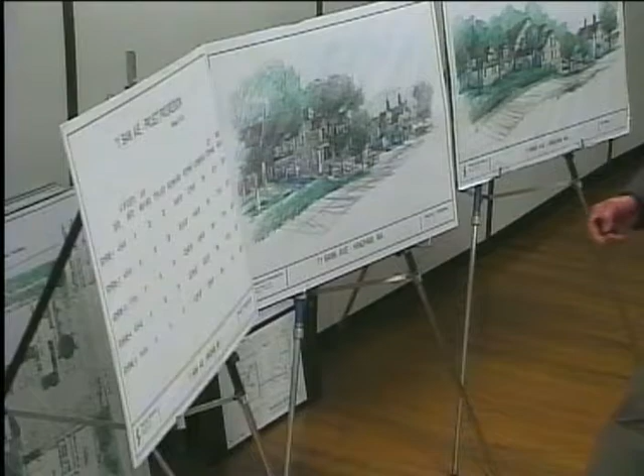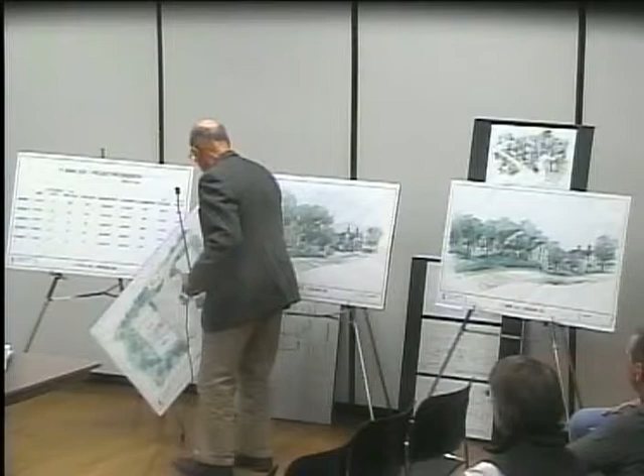And this is our 5,000 square foot footprint. The intent here is to design a building that is really a sister back building to Bank Ave, with similar detailing, 2-over-2 windows, much more compact footprint, and build it into the slope so that all the retail activity—we have an in and out roadway, by the way, eliminating sightline issues—the retail and parking area activity takes place on this lower level, which is 12 feet below the upper part of the Bank Ave site.

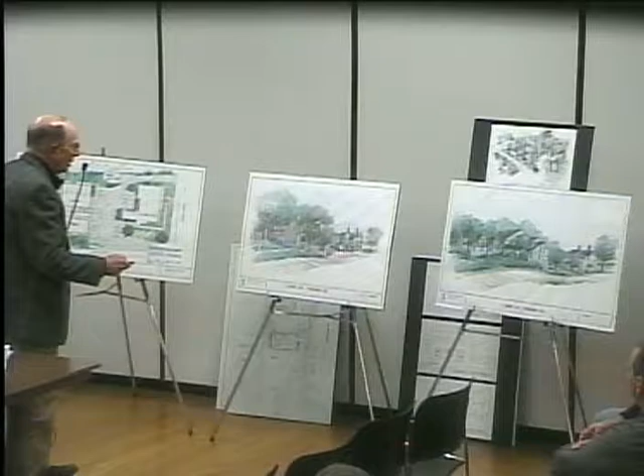It's a very viable little close, what you'd call in Britain, but it's like what exists in Plymouth—little commercial spaces that come off the main street. The activity going into the parking garage is at the lower level.

Comparing it with the previous scheme, where we tried to develop some one-story elements to keep the scale down, but the footprint was larger—you can see the difference. A lot of this ground is left untouched.

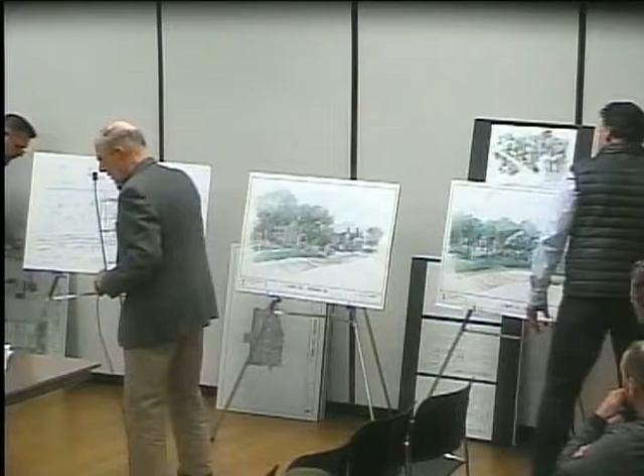Here's the overall view, not quite to the Olin's property at the end of Bank Ave, but you can see how minimally the site is impacted by the footprint. These buildings are 90 feet apart—there's a lot of space to maneuver and buffer. The building is 30 feet back off Bank Ave, 35 feet off this border, and over 100 feet from the back border.

And even though this existing ridge is at 27 feet, with about 8-foot chimneys, this ridge is at 38 feet—so we dropped that from the 50 feet we showed in the scheme presented to the planning board.

So I think we can get into elevations if you want, in some detail, but I'm going to twist it around—need that wireless, I'll grab it, we can bring more up.

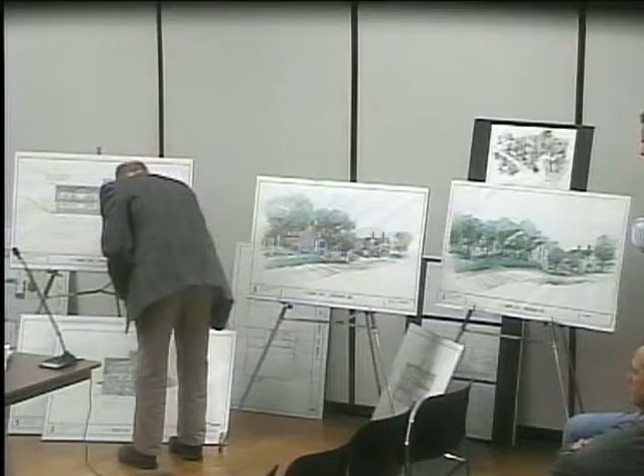Do you have a left side elevation too? Because that's going to impact the Bank Ave side then.

So this is the same stepping up. Now being 30 feet back off the property line on that side of Bank Ave, there's a lot of opportunity, which we didn't show here, to plant and to buffer.

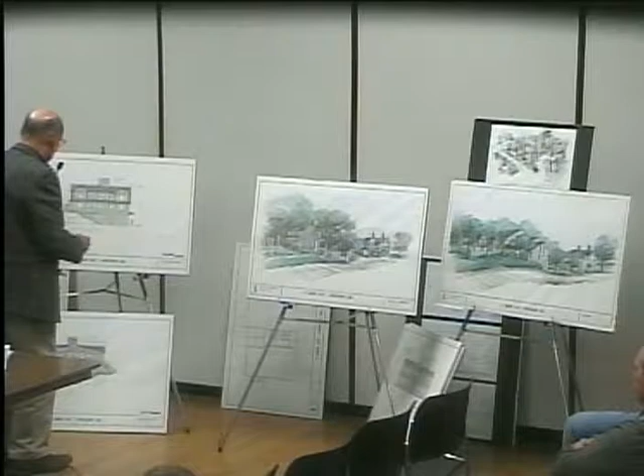But that's the Bank Ave view looking toward North Street, and this is the Bank Ave elevation with the stone and the broken roof line, stone chimney. The lower level.

John, anything else, or good? I think we were asked just to present the plan, you folks all have copies. I think that was the intent of tonight, just to introduce the property and the proposed architectural scheme, and we'll look forward to coming back in December on a more formal basis. Okay, really appreciate it. We appreciate the time tonight.

Any questions for John or for Sevi? Who would like to start? Any thoughts? I have a question. Yeah, please. Sevi, the stone that you mentioned, can you give a description of what that stone is? Is this a cut square stone? Is it irregular? It'd be a fieldstone, informal, irregular, a veneer.

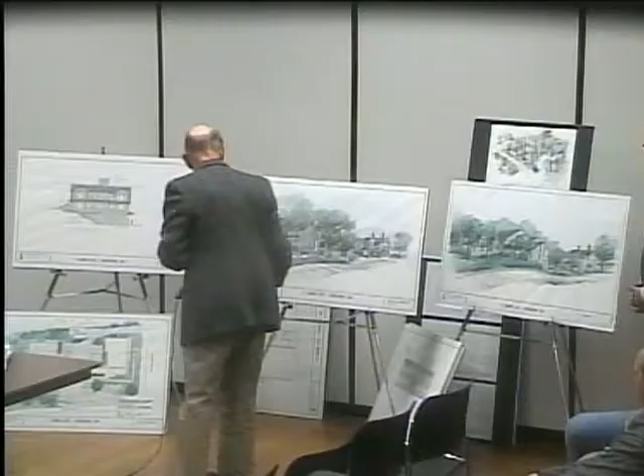Okay. But it would be 2-inch plus or minus to get texture to it. But it'd be an irregular fieldstone character, much as we're indicating here, it would have a variety of color, something that would fit into a hillside. Right. Is there any stone on 105?

Is that all clapboard? It's all clapboard, but that is a flat site building, and the point is not to replicate 105, which is a flat site building. This is kind of a secondary, almost a barn-like, informal approach to it. So it's a sister building, but it's secondary. It's not a replication of 105, so we think the stone adds that informality and softens it and reduces scale. But it's quite barn-like.

I guess I'd just like to see a sample of the stone. Oh, yeah, I would, for your... There's a lot available now. We use quite a bit of it. Okay.

Are you planning any modifications to the North Street property, or is it strictly the demolition of the one building, site work, and the addition of the new big building? That's accurate. I acquired the property this past year and plan on making kind of cosmetic improvements, but in terms of structural or anything with respect to footprint, no. Really, this is specific to the back parcel. Okay, okay, thanks.

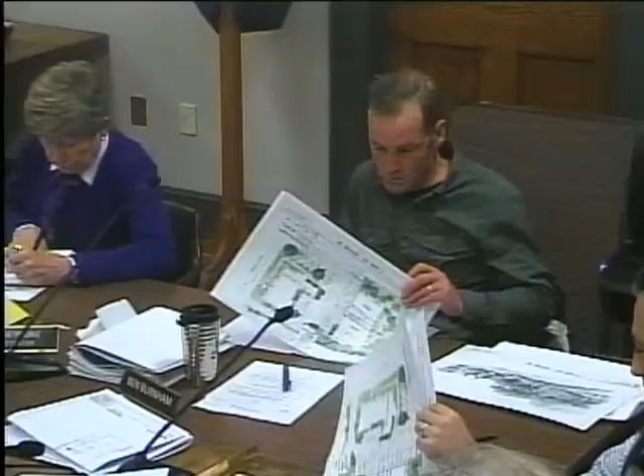One other comment in regard to the elevator and the override. I appreciate the need to do it on a small building, trying to squeeze an elevator in there. I'd just be concerned about what that override ultimately becomes and how big it is and how tall it's going to be, because it looks pretty big now, and maybe there's some accuracy in terms of the height, but I'd be concerned about what the scale of that is compared to the rest of the building.

Well, it's an elevator, 13'8" off the last stop. The elevator that I know you're very sensitive to on the Lincoln building grew out of the fact that the roof was the last stop. That was a roof terrace, so it had to go another 13'8".

I've done elevators enclosed like that—Scott Oliver's medical building down in Duxbury on 3A, a very traditional looking hotel-like shingle-style building, and actually on the Kings Highway in Barnstable, which is all highly regulated historically. So the vent is quite small relative to that. It could be on the back side, just a 2x2. But the size is accurate—I mean the elevator shaft. The elevator shaft is approximately 8x8, and that's what we're showing.

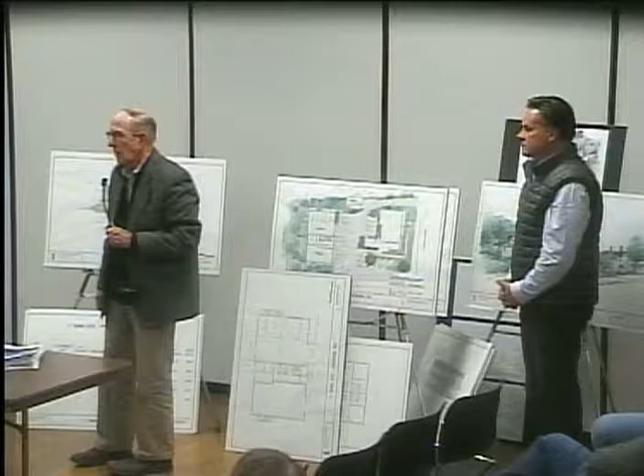We can show that in sections. Obviously, it's bigger, but the ridge, essentially what faces those houses, is 2 stories. That ridge is 38 feet from the lower level. From the upper level that faces the Bank Ave houses, it's 26 feet. Although part of that drops down, right? It's not all... it drops away. Correct.

But it's also 40 feet from those houses, so it's a considerable distance, and it's an opportunity for buffering.

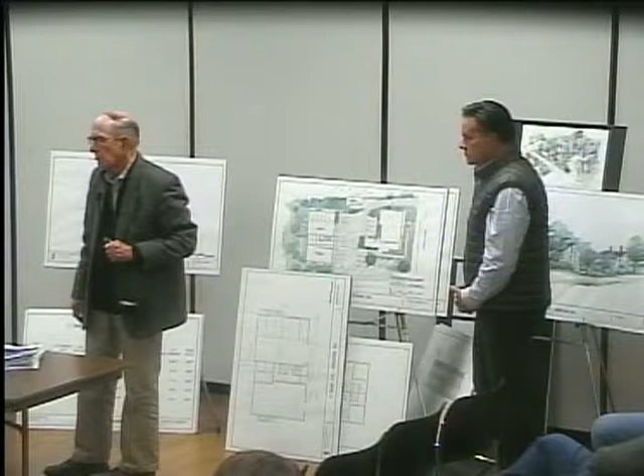Do you have this drawing staked out right now on the property? No, but we could. Come out to see it? That would be really helpful. I went on the lot, and I can't imagine it, but to see it that way would be helpful.

Can I follow up a little bit on that comment? I think it's important. We've been working on this for a while, and I'm in the business of land use and zoning. The piece of land is zoned commercial, with 0 setback requirements under the town zoning bylaw. There are no coverage requirements in the commercial zone, and there's no stated height restriction.

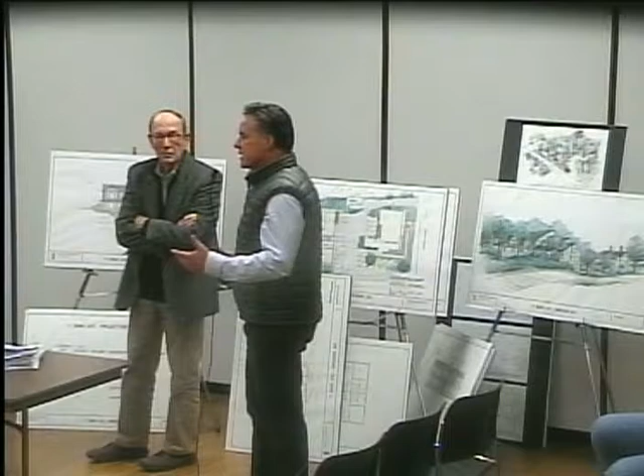We've really dramatically scaled back what we're proposing on the site to accommodate the abutters and comments from the other boards. By right, a commercial building could be built on this property with zero setback requirements. It's not meant to be threatening, it's just saying we've worked very hard to mitigate the concerns of the abutters. It's a transitional piece of land, not right out on North Street. It sits between a commercial district and a residential district, and I think what we're proposing is definitely in scale and keeps with that transitional zone.

I just wanted to point out that the zoning for this property is commercial, and it seems a mixed use of this scale is what's appropriate for it. I think Sevi has represented it very nicely in the architecturals, and our team, John Cavanaugh with Cavanaugh Consulting, we've worked for 6 months now trying to get to a point where we have a proposal that really works fully within the spirit of the bylaw, and is very accommodating to the abutters in the downtown district.

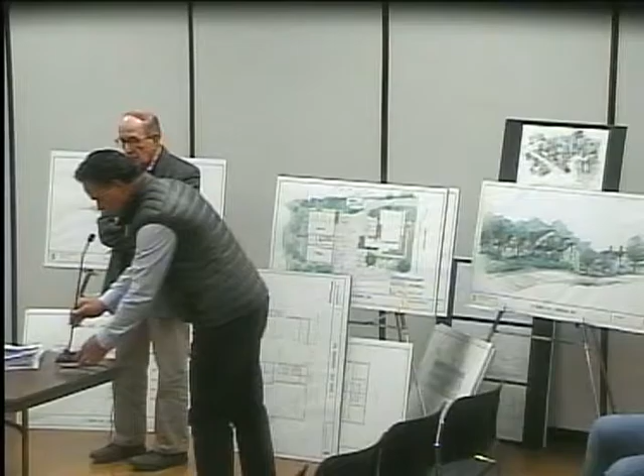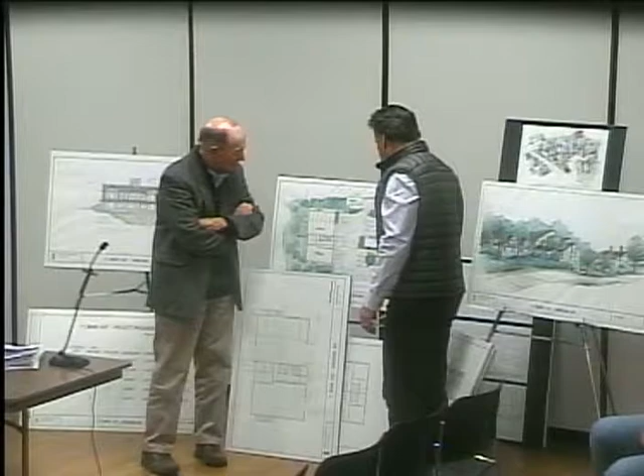What's the square footage of the building in front? The total square footage of the building out front? Sevi, do you know that off the top yet? How about the footprint? The footprint is, you're looking at about 89... this is a 90-foot building that scales at probably 75 to 80 feet wide. At the deepest point, it's probably 60 to 70 feet. This building is 55, so it's generally in character with the footprint of the building out front.

This is bigger, but it's... don't forget the microphone, gentlemen. Oh, sorry. It's larger, but it's connected to it. It really is the same kind of footprint. So we can give you those numbers, but it's not about the numbers, it's about the relationship.

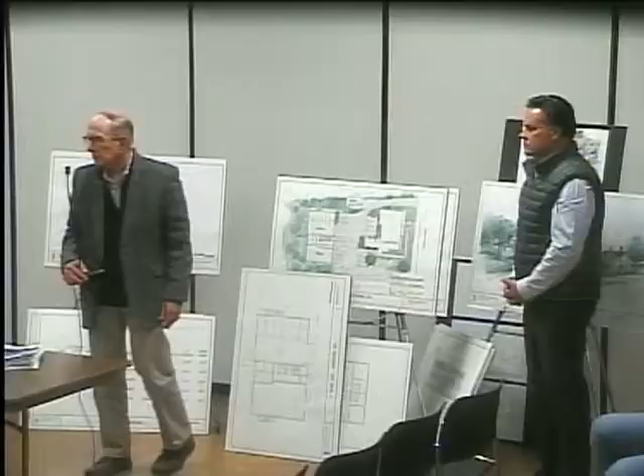I think it'd be helpful, because the Bank Avenue homes are certainly smaller, as Mike's pointed out, but that might be the best one you want to use in your favor as a comparison. So those numbers would be good, handy to have, I think.

I will say, I went to the planning board meeting a few months back when you guys had your first plan. You've come a long way, there's no question. The original design was substantially larger, and the numbers show it. So I hear what you're saying, Joe.

As it relates to the new construction in the back to the front, would it be possible to see this in a model as well?

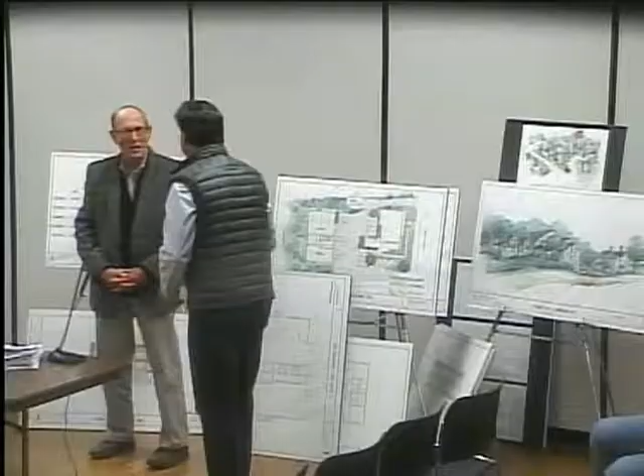So, would you have a model of the front building as well as the new building in the back and the immediate adjacent buildings? Sure. I could find someone who could do it for you. I think the answer is we could provide a model. I think one thing is to stake it out, but another thing is to actually see it in a model as it relates to the immediate adjacent buildings.

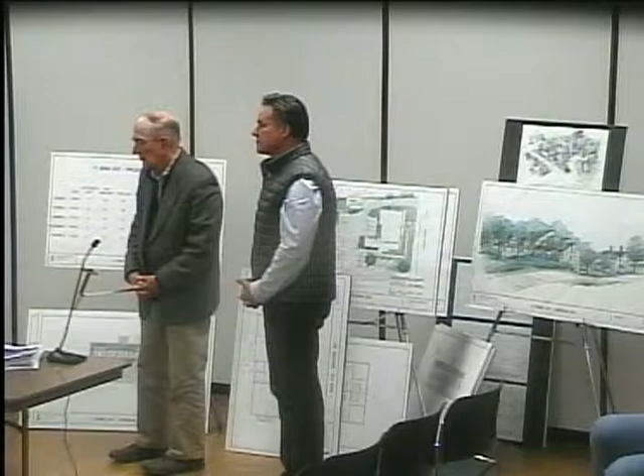Yeah, I mean, would story poles help in this case? We could ask for that at some point.

The model might be more appropriate, just because I don't think we need to do a model of all of Bank Ave and all the adjacent houses, but I think standing there with story poles - we could easily do a model of those two buildings, but is that really going to satisfy you compared to story poles?

And the grades - I think for the neighbors and for us, if there was a way to show this ridge going parallel to Bank Ave, get the height on that, and then maybe this front facade somehow, it might be a good visual for everyone in the neighborhood.

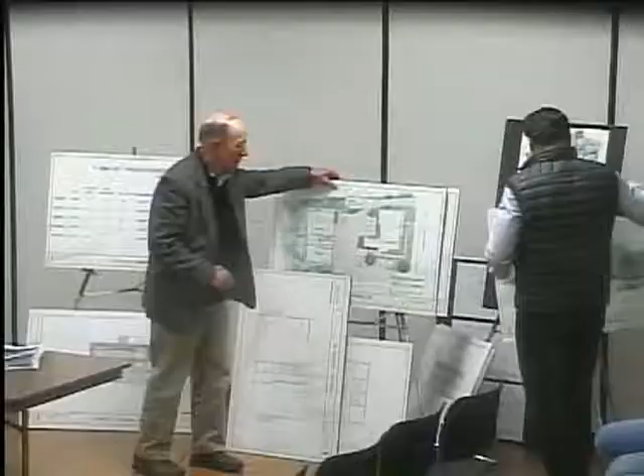So story poles, yeah, I think you got something similar to a model. And that overhead - I think it's the last one you have, lower, yeah, way down, behind there. Is that the most recent, or the third one down? This is the most recent. The third one, these were all prior iterations - the fourth was the large rendering, and this is the fifth.

Would something like that help in terms of a visual, if they were to do an updated one? So you think we're talking about this representation? That's more of an artist rendering - I won't say it's not totally accurate, but it's not a measured drawing. And I think this is actually more accurate. I think any of those look pretty good, frankly, but it doesn't really help you compare them.

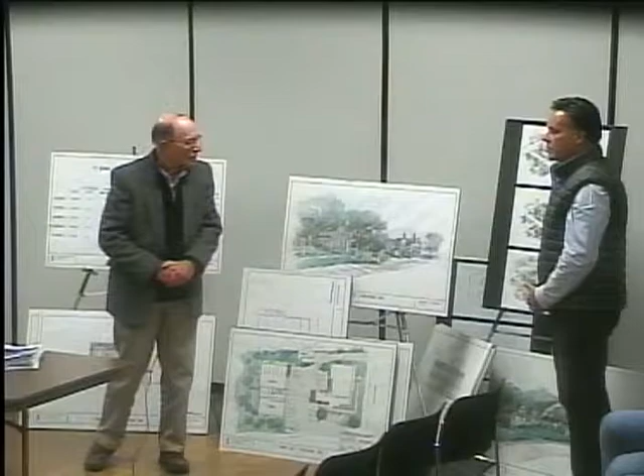So we provide story poles for sure, and we get the footprint of the building staked out and get story poles there. I don't know if we do it in advance of the full meeting or just after, but happy to have a site visit to go over that.

So, yeah, we could come out on a Saturday before the next meeting. If you can get them up, great. It would certainly give us something to talk about at the next meeting when you come in.

Are you meeting with the planning board or zoning board? Not until January. We have delayed and asked for postponement until we have some direction from this board. Okay, all right.

Can everyone come back next month for questions and to take a look at the story poles? The site visit, when we go out there, will be an open meeting, so everybody's welcome to attend. You can ask questions and see what's there, and then you're all welcome to come back next time, and then we'll take all the questions. The floor is open. Hopefully that works. Any more questions here?

Have we decided, Thomas, are you okay with the story poles and staking it out? I think for now I'm okay with the story poles. I think we should start with the story poles. Yeah, probably - if there are more questions later, then we can ask for that.